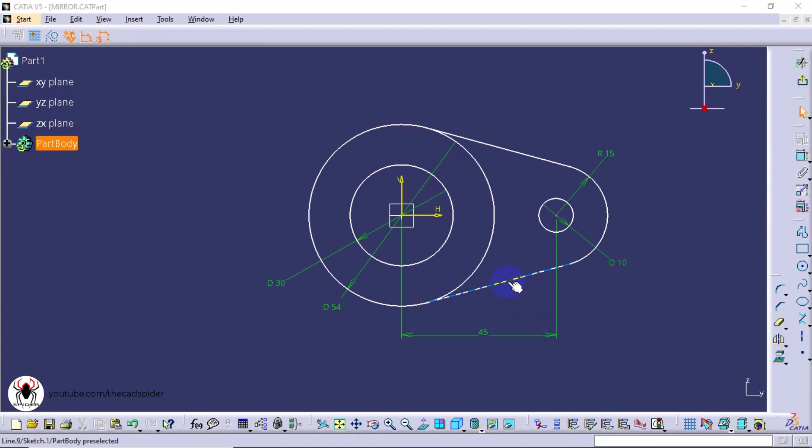First tool is mirror. First, select elements to mirror. Then select mirror tool, and select axis or line. If you change dimension on one side, changes are updated on both sides.

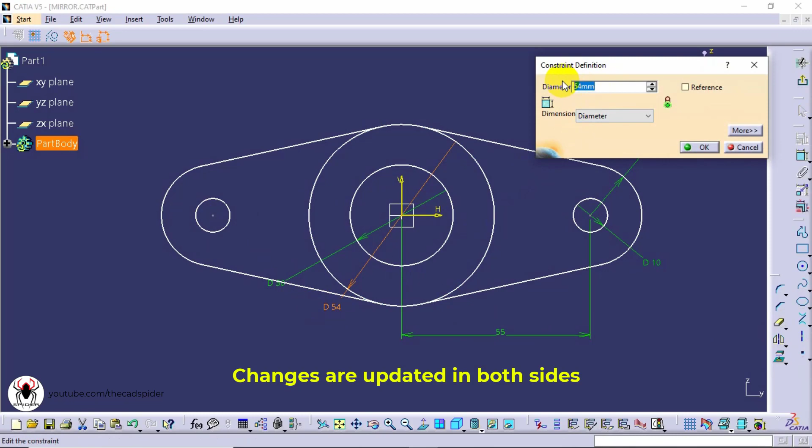Next tool is symmetry. Select the elements, then select symmetry tool, then select axis or line. New elements are created and source elements are erased.

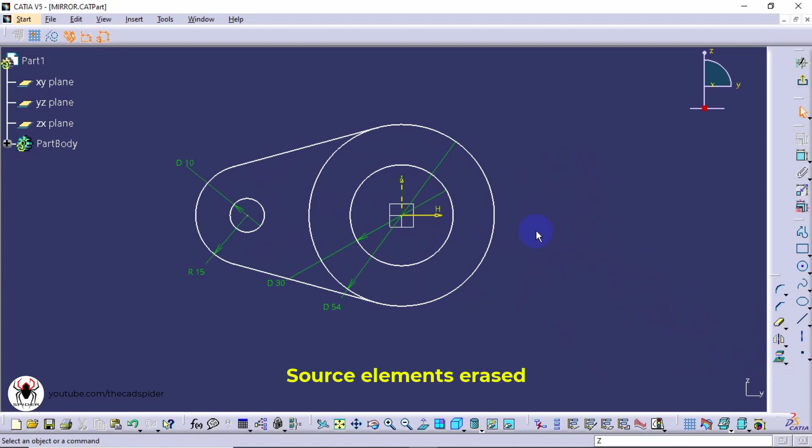Next tool is translate. Select the elements to translate, select translate tool. Disable duplicate mode, then select start point. Specify length value, then select endpoint.

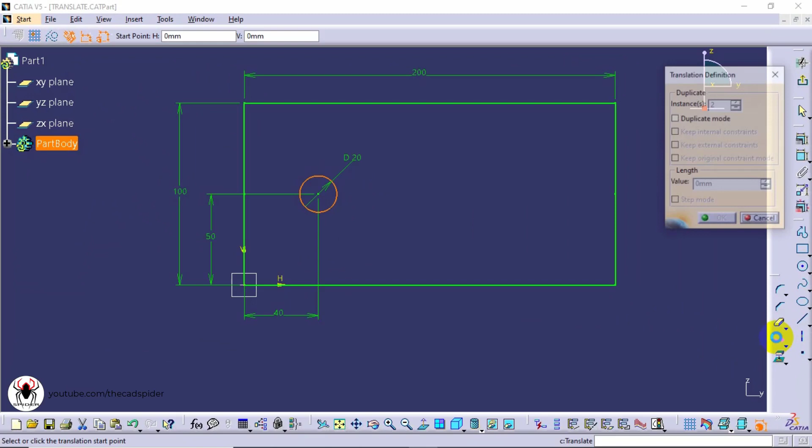Next, enable duplicate mode, then specify instances. Select start point, specify length value, and select endpoint. Elements are duplicated; duplicated elements are not constrained.

Next, enable the Keep Internal Constraints option. Select start point, specify length value, and select endpoint. Elements' internal constraints are only created here.

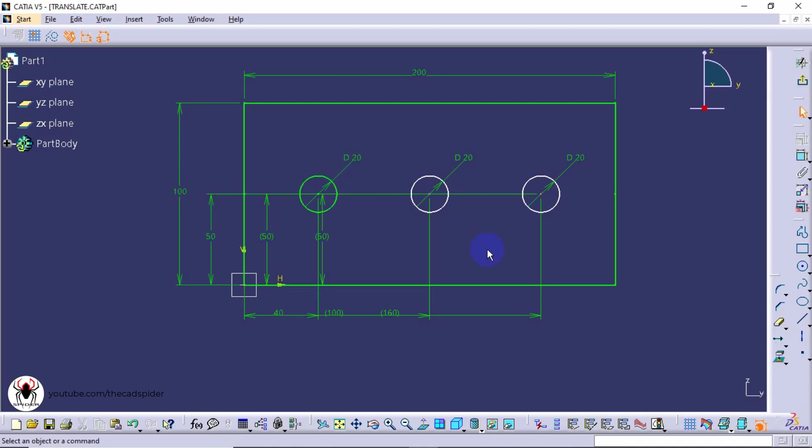Next, enable the Keep External Constraints option. Select start point, specify length value, and select endpoint. Internal and external constraints are created here. External constraints are reference ones.

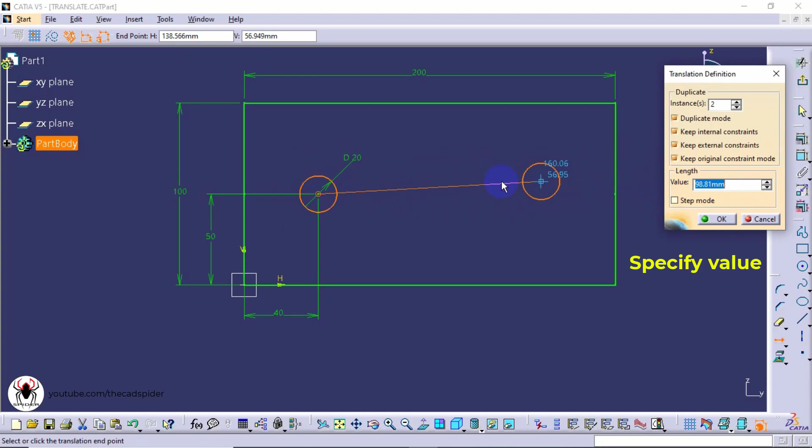Next, enable the Keep Original Constraints Mode option. Select start point, specify length value, and select endpoint. Internal and original constraints are created.

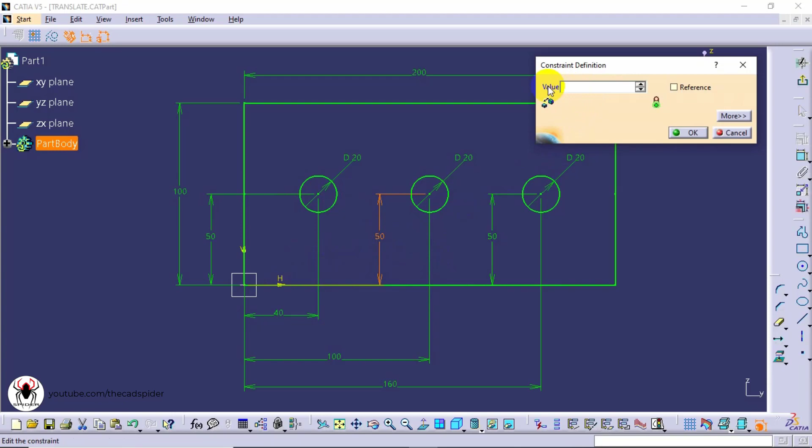Next option is step mode. Select translate tool, then specify instances. Select start point. Step mode restricts cursor movement to every 5 mm increments.

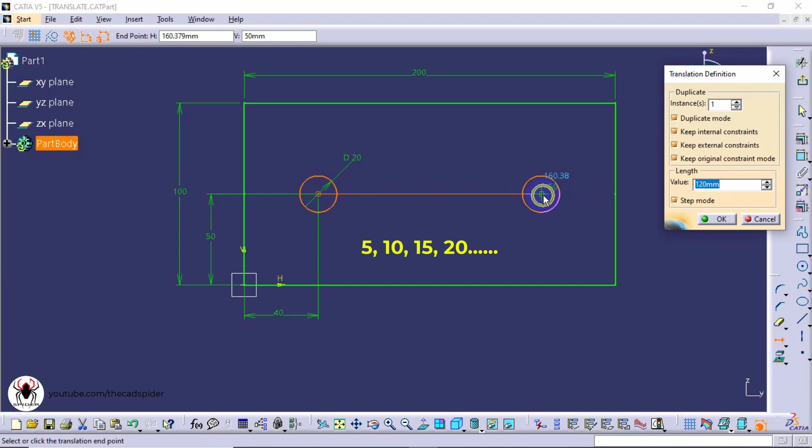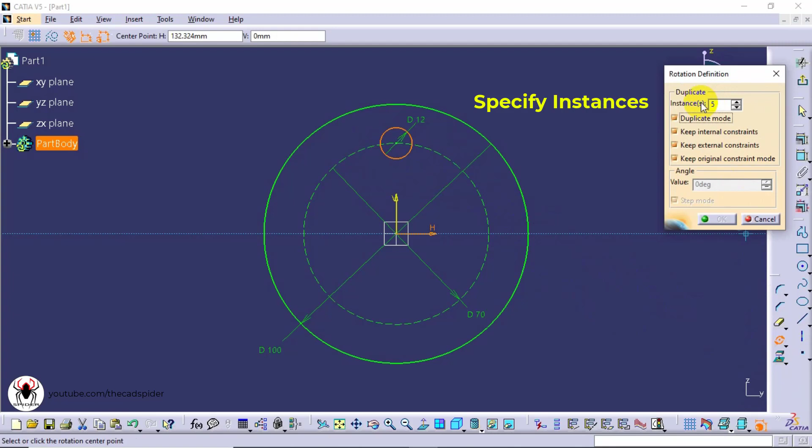Next tool is rotate. Select the elements, select rotate tool, then specify instances. Select center point, then select angle start point. Now specify rotation angle.

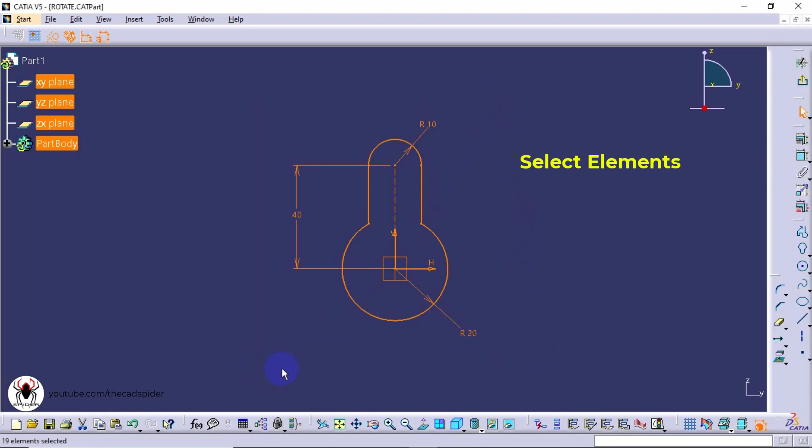Select the elements, select rotate tool. Disable duplicate mode, select center point, then select angle start point. Now specify rotation angle.

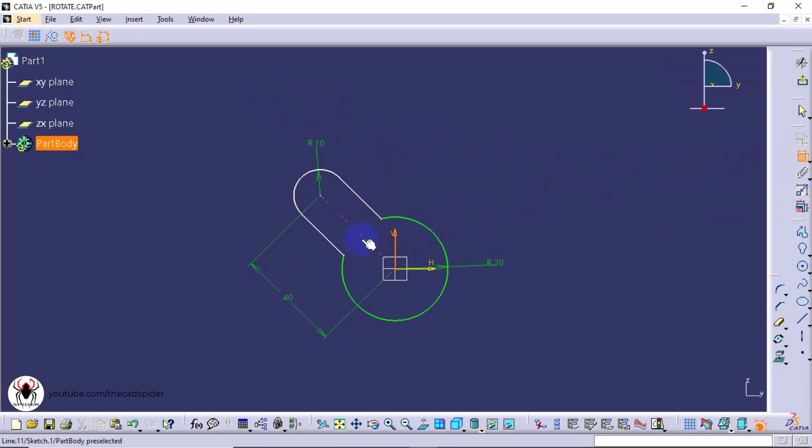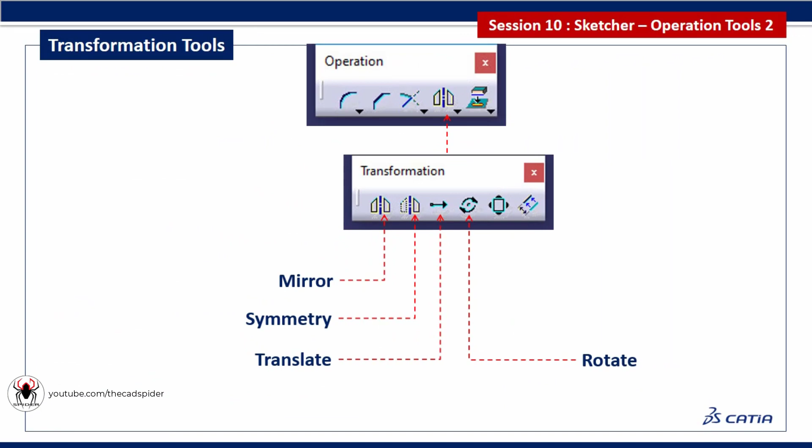Next tool is Scale. Select the elements, select Scale tool. Next, enable duplicate mode, select center point. Now specify scale value.

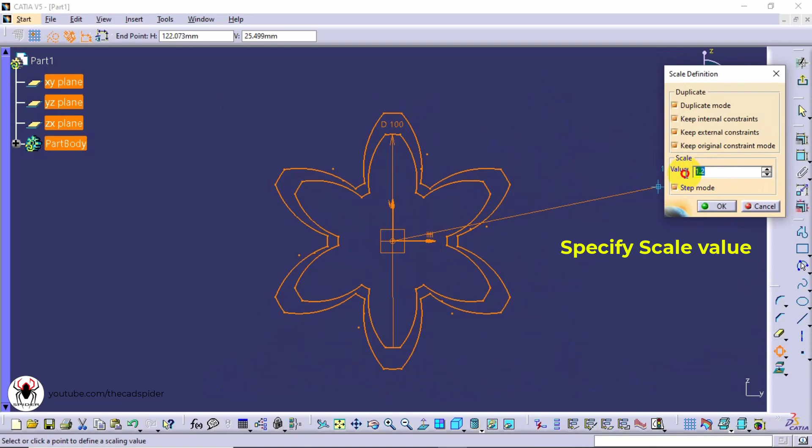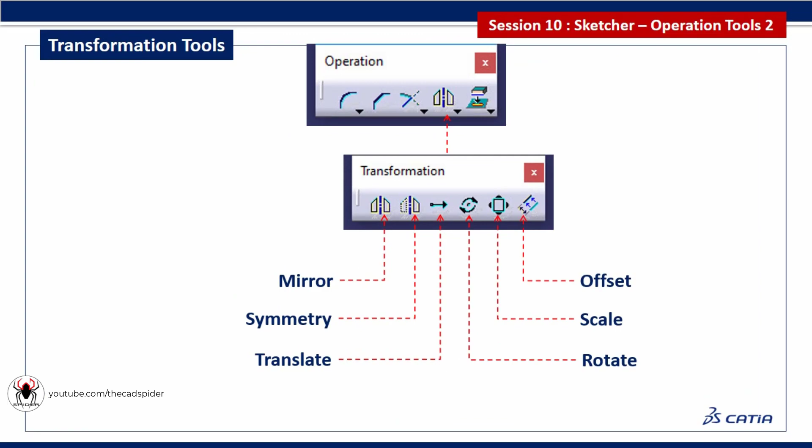Next tool is Offset. Select Offset tool. First option is No propagation. Select the elements, then specify offset value. This option is used to offset single elements only.

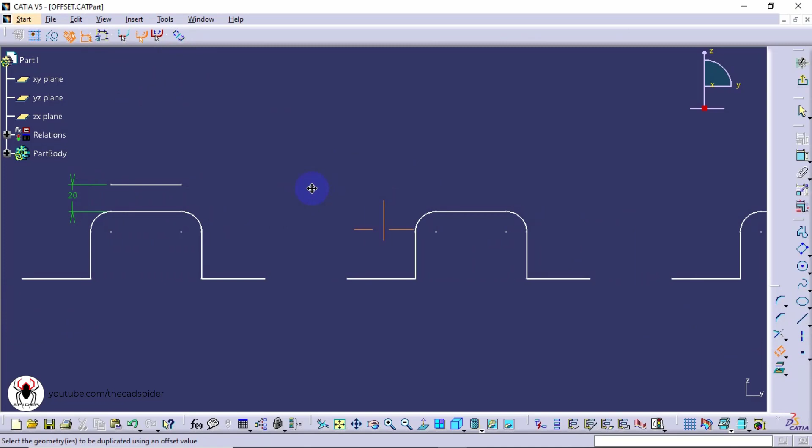Second option is Tangent propagation. Select the elements, then specify offset value. This option is used to offset tangent elements only.

Third option is Point propagation. Select the elements, then specify offset value. This option is used to offset all continuous elements.

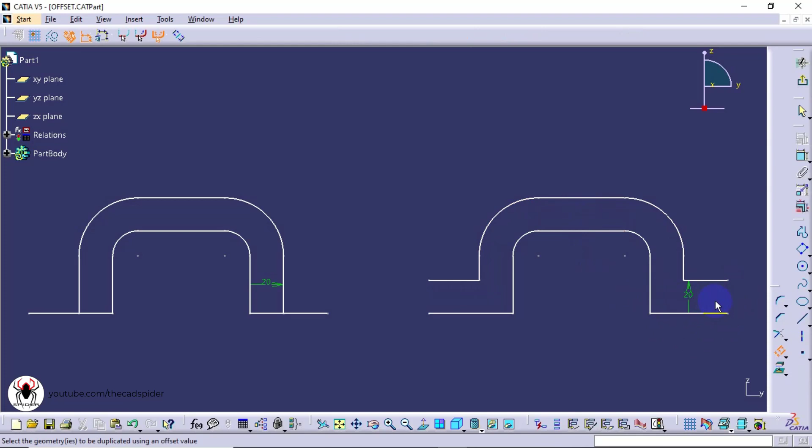Fourth option is Both side offset. Select the elements, then specify offset value.

Last option is Number of instances. Select the elements, then specify instances, and specify offset value.